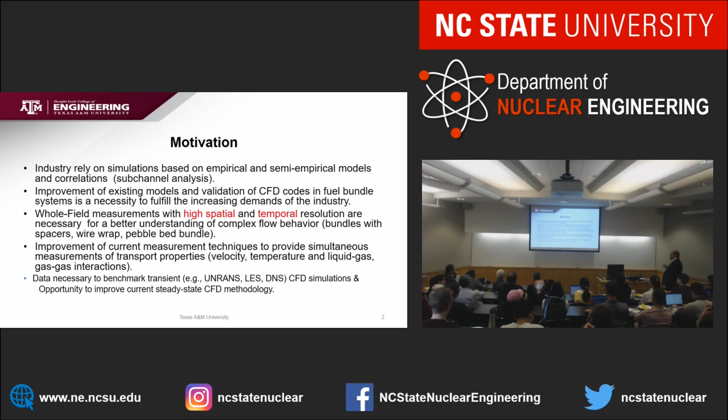We have a lot of collaboration with partners. We worked with some utilities, South Texas Project, with some companies there to try to solve problems, like deposition of debris from the containment on the screen that might prevent water going back to the reactor. We did some work with South Texas Project, and also pebble bed work.

We have some work with Belgium, SCK•CEN, because they're interested in liquid metal reactors. And we have a lot of work with CASL, which you guys are a major player in, along with Sandia and other labs.

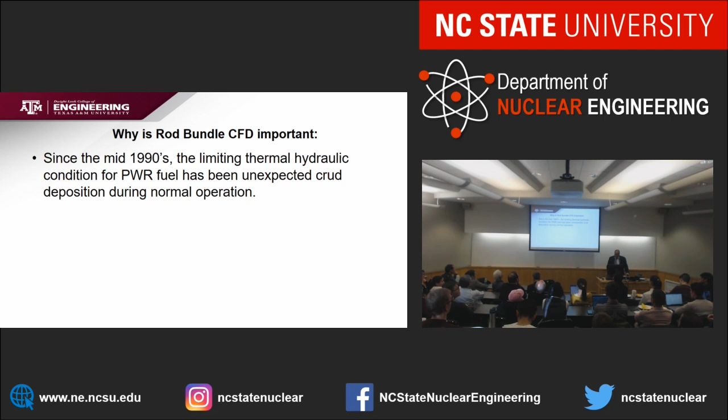I'm going to talk about some of the measurements we're doing for preventing - you're aware here with the crud deposition. So we're doing some work in light water reactor, and in advanced high temperature gas cooled reactor.

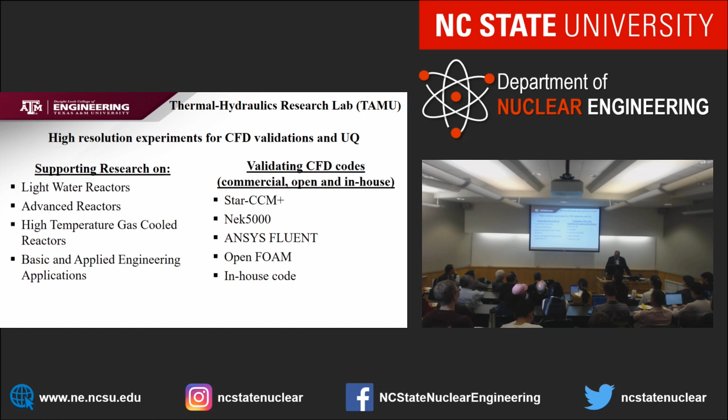For validation, we have our own codes, but at the same time we're using commercial codes like Star CCM, Fluent, and CFX. In addition, we have a lot of work with NEK5000, which we use for direct numerical simulations, and OpenFOAM, which I see a lot of work here you're doing. I'll skip that - Igor knows that more than me, and Namdina.

What is the difference between verification and validation? To solve the mathematical equation correctly doesn't mean the equation really is right from the point of view of physics - it doesn't reflect the real physics. That's why validation needs experimental data. You need a good solution technique and so on, so V&V is becoming a major task.

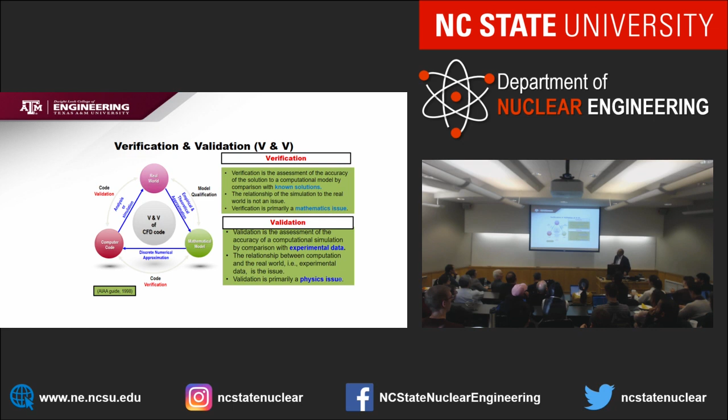Even the American Society of Mechanical Engineering has different committees - 10 for structure mechanics, 20 for fluid flow, 30 for nuclear systems. And now there's a lot of work on scaling, and Namdina is collaborating on that.

So here is one experiment we tried to do. The reason there's interest here in North Carolina is the spacer and the wire wrap. Wire wrap is used for liquid metal reactors - instead of using the spacer grid, they have the rod and put wire around it, which increases heat transfer while reducing vibration of the tube. So we need that. There's a lot of CFD calculation, but the challenge is how to validate it.

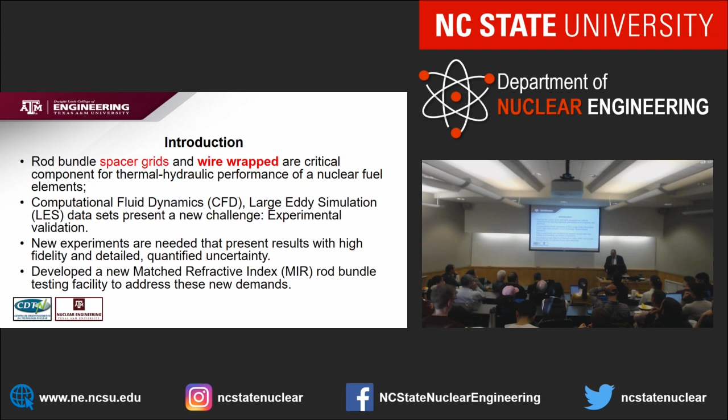So that's our work - we came up with a certain scheme. Our bundle here has 60 or so rods, and here is a spacer grid. That work is also done under CASL.

This is the data we get, running Star CCM with about 500 million nodes. It took about 2 months for the student to do that on a Blue Gene machine, but you can see the structure of the flow. The most difficult part is deciding what kind of turbulence modeling to use - that's important to understand the phenomena so we can use other codes.

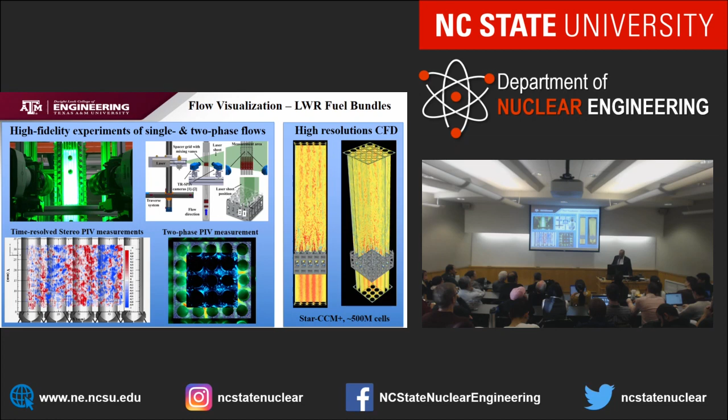To compare this data, we used certain rods with the same matching refractive index as water, so when you do that it becomes transparent, and we use our laser technique to measure it. Here, let's show some of the results - NEUP, which we did before with TerraPower because they're interested in liquid metal, and with Argonne National Lab because we use NEK5000.

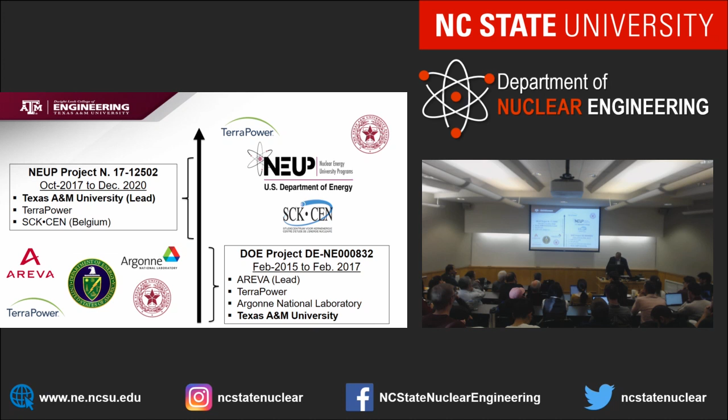So the project is a bundle here, and we used wire wrap to produce the rods.

You can see the rods, we produce this with acrylic. It took us a lot of time to get the right pitch and develop a technique to wrap the wire on the rod, and then we put it and establish it.

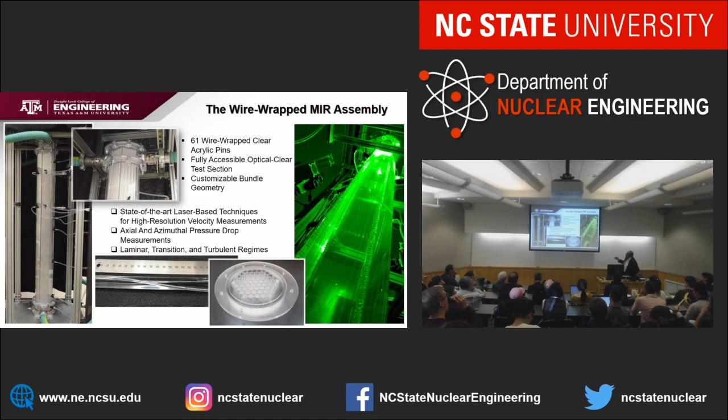So we have this kind of bundle here, and that shows the bundle. You can see this is the rods. Then we have a certain fluid that has a matched index, so it becomes transparent. After that we use our laser technique, which is presented in many papers.

So you can use the two-dimensional approach to get the velocity in a plane, or use a stereoscopic setup. In this case you need at least 2-3 cameras to get a 3D dimensional result. And that fluid is known to have that property.

At the same time, we have particle image velocimetry, which gives a full field measurement of the velocity, but we also like to validate it, so we use another technique, laser Doppler velocimetry, at a local point inside the bundle. So this is the first result you get inside the bundle.

There was a lot of experiments performed in the 1980s and 70s in Germany to get the pressure drop, but they didn't know what the structure of the flow was.

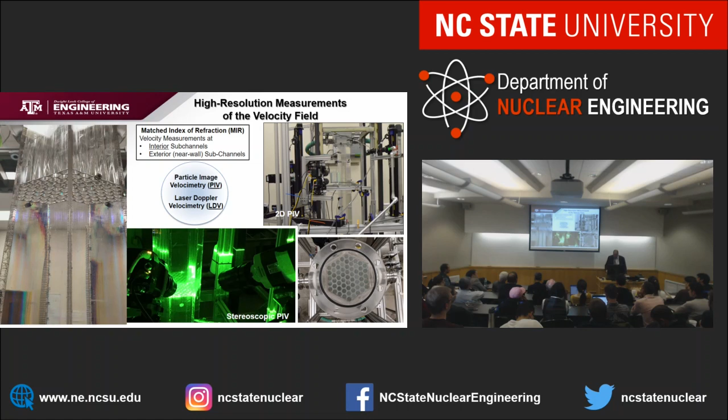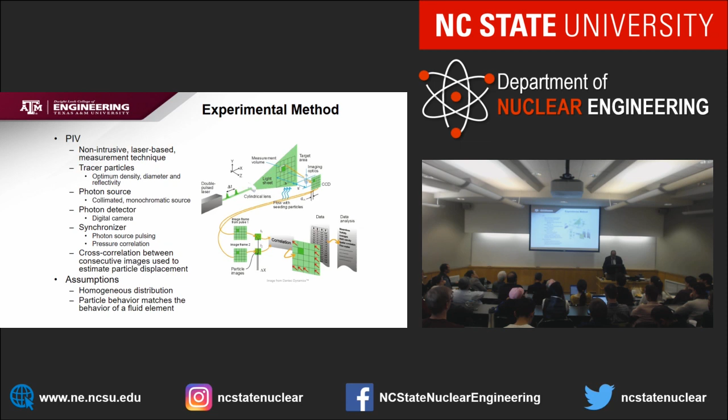So now we have all this stuff to do. That shows the experiment we have, the fluid and so on, and we use our technique and do certain analysis here.

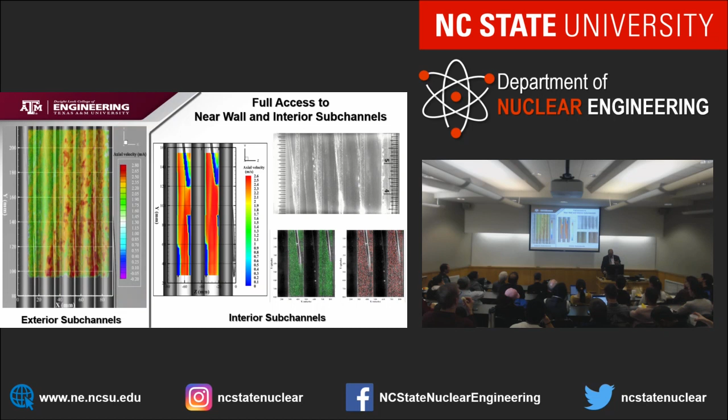But we like to see the exchange of flow from one sub-channel to another, so we had to come up with a different way of measurement. So we get our laser here, our camera has to be on the top.

It took a lot of time, and we tried to focus on several sub-channels here to get the velocity in the horizontal plane.

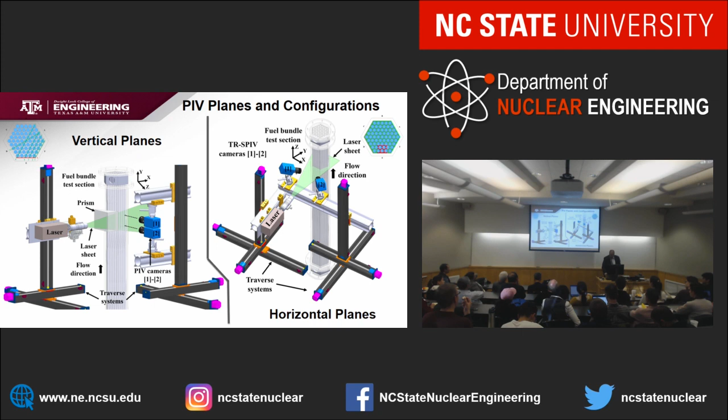And that shows some of our velocity here in the axial direction, one, two. You can see the reason we use two cameras in that region.

The reason for doing that is because we tried to use high resolution, and we reached a length scale of about 10 micron or 20 micron. So we're getting the fluctuations down to the smallest scale of the structure of the fluid.

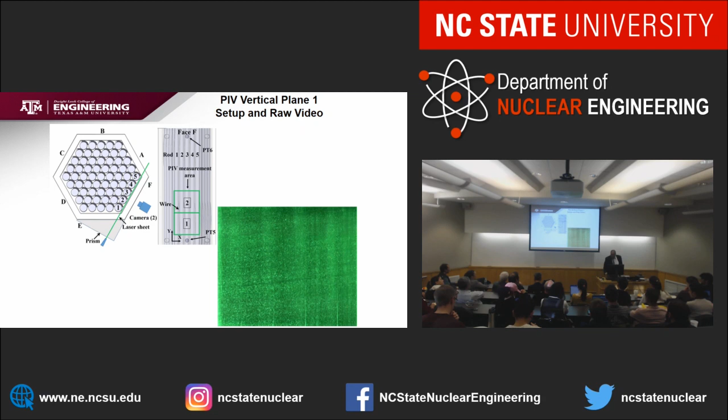And we did that at different Reynolds numbers. Here you can see 4,000 and 19,000. The flow comes in with this.

The reason also, I forgot to say, we measure the pressure drop too. We have a sensor here, so we can get the pressure drop. There was a lot of measurement before to measure the pressure drop, because that's one of the most important parameters for designing this reactor.

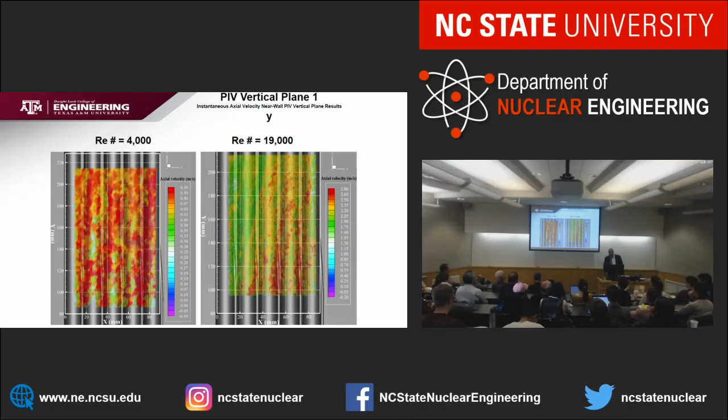So we get that here, but we also get the time. You can see here, I don't want to bother you, you get instantaneous velocity and so on with the time. So that's one of the things.

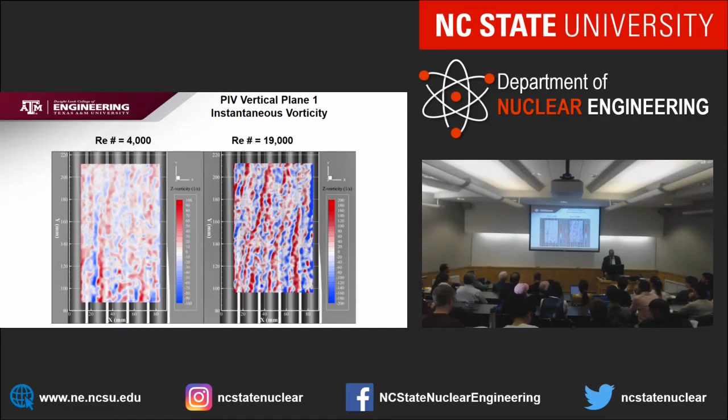But one of the interesting things, people in Belgium told me, sometimes you have a blockage in the channel. They found that in liquid metal you get a blockage, and they wanted to see what's going on.

So we blocked one of the channels here, you can see we blocked two channels, and tried to see what the velocity was below and after that. This became of interest to people building liquid metal reactors, because of the blockage issue and different structures of the flow.

So we had a blockage at the center of the channel, and a blockage in the boundary here, interior. So this data is very rich data for validation of the code.

In Germany or Belgium, they had another experiment with about 19 rods, here 61, and they used sodium and heated it. It's interesting that they only got temperature measurement, and maybe pressure drop, but temperature measurement, and they did their CFD with no comparison. They could not know what was going on.

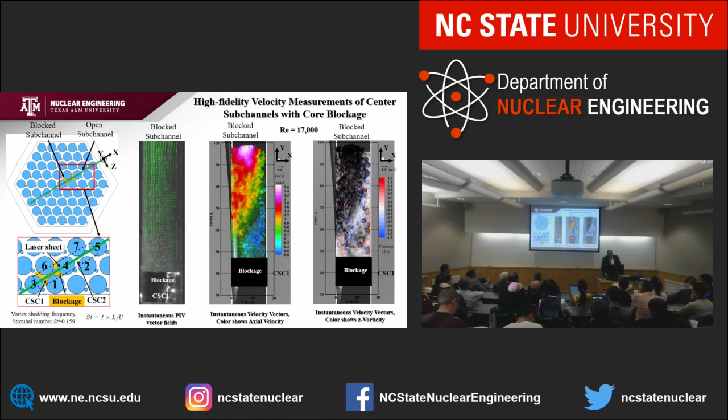So our data here, at least gets the physics phenomena, and that's of some interest. Again, this is just a flash.

In any experiment, you have to do an uncertainty analysis. If you give an experiment without this error analysis, it's not a real experiment. Like Igor mentioned, when I look at papers coming into Nuclear Engineering and Design, if the author has a measurement without any analysis, I return it back.

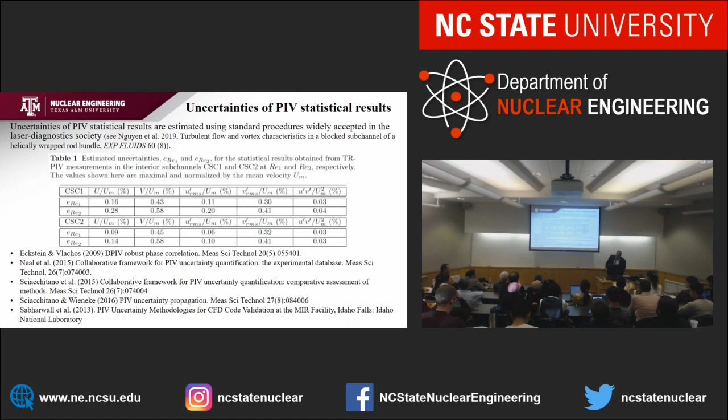Here is what we did, NEK5000 as a code. This is a comparison between NEK5000, the solid line, and the data. This is a code which ANL, Argonne National Lab, got our data and did using large eddy simulation and compared that. It takes them a long time, like the experiment really, I can say.

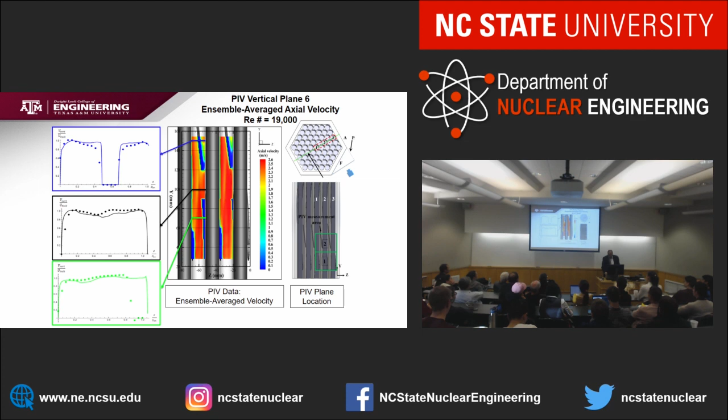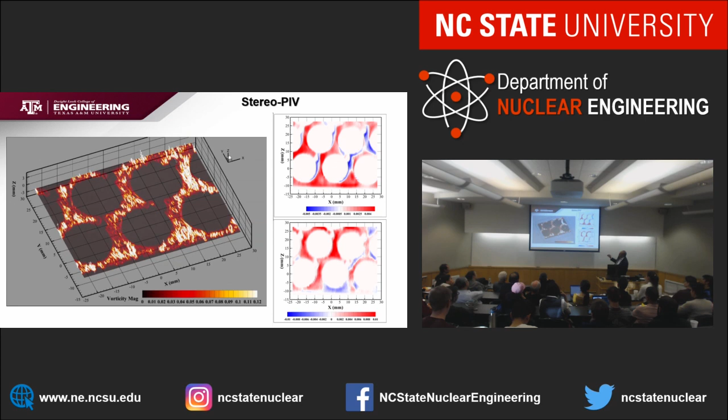This shows the 3D, but it's not really clear. There is the exchange of momentum between sub-channel to the other. We should understand that and get it.

This is one of the pressure measurements here, there is a lot of correlation of this measurement. So what we did, our measurement from 200 to 20,000, you can see Reynolds number.

There is another figure, not here, with other correlation, and you can see a large uncertainty there. But one of the points we are so proud of, that we got at Reynolds number about 100 or 200, or 250. There is no experiment for the wire wrap in a bundle lower than 2,000. It's amazing, because the reason is getting the flow rate.

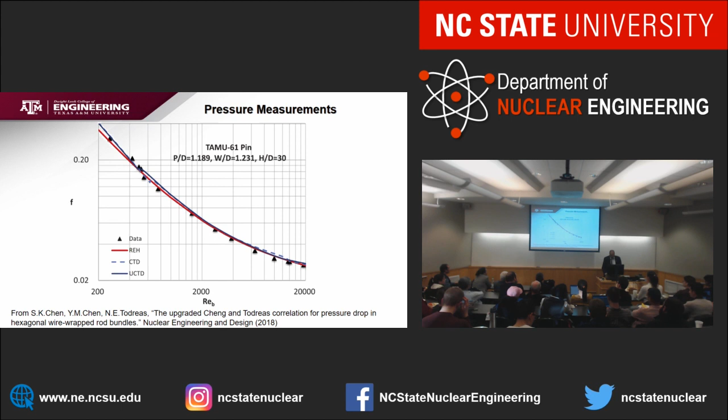One of the most difficult things in the measurement is the low flow rate in the lab, using ultrasonic or whatever it is. So that was the first point. We didn't find anything, so this correlation can be used, TerraPower is using it for their design and so on.

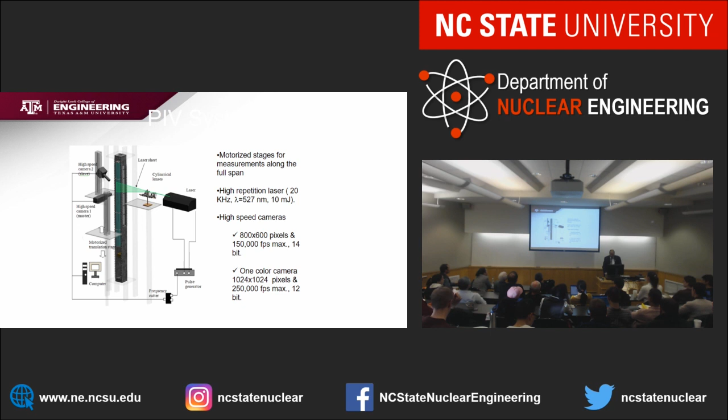This showing the velocity in a wire wrap. The other thing we showed before is the bundle, is a mixing vane. You can see here also we used our fluid, that's important to see the measurement in a micro scale measurement, before and after.

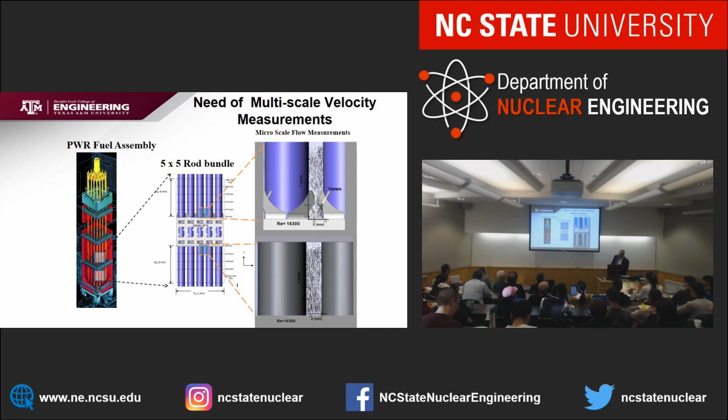So that's very good for CFD measurement, you can average it and also get this measurement to use for other codes like COBRA-TF and the sub-channel code. You can see how painful it is doing this, 1 million vectors here, and the time resolution 125 microseconds. So it's huge, every time they want storage, the experiment is producing a lot of storage.

Maybe this data is important for machine learning, to train or to do that when we scale it or use it. So this data is available, and that.

As I mentioned before, this is the reason I put this, Igor. We got a 3x3 from Dresden, and they shipped it to us, a bundle. They have 3x3, and they want to do measurement using our facility. Why? Because they have X-ray, and of course they want to compare it.

So the engineer came here, spending 6 months, put the experiment together to get the velocity distribution in this. So we give them that, then take the data.

When this sub-channel is about 1 meter, and it came to Houston, our colleague German, he said a nuclear bundle. Then they took it in customs and called the president of Texas A&M, what's that? And so they called me, and I had to explain, it's a sub-channel, believe me, there is nothing there. It's a glass. And they should have said it's a 9-barrel gun, right?

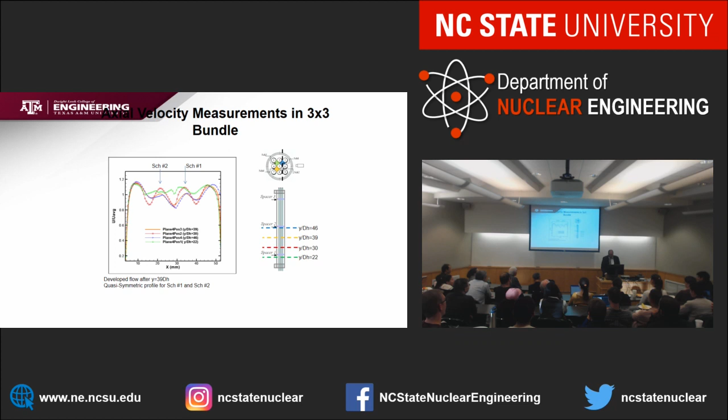Yeah, so then we had to send the student down to pick it up and send a paper saying it is, oh my gosh, what a mess. So you can see, next time when I ship something, I don't write that.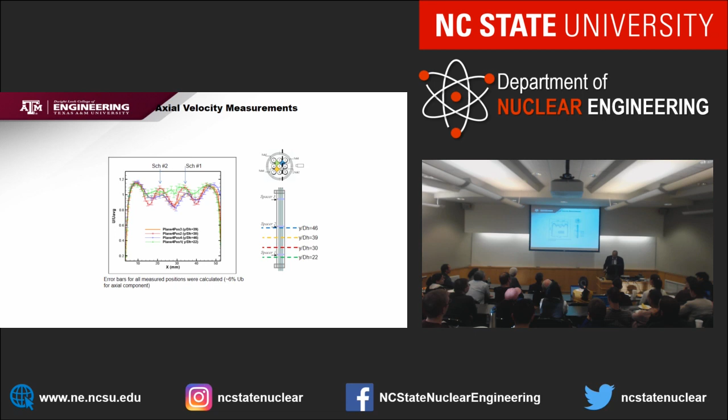But here to show, you have to have error. If you don't have this error bars, forget it, this paper will not publish. So please, when you do analysis in the lab, you have to do that.

Here also to show some of the work we did, you have a spacer, 5x5, we got it from Westinghouse, and we put the fluid here. This is a new fluid that has matched refractive index as the glass. Here is some of the air. Then it's really beautiful, you can use a laser, you can do that. So we did a flow visualization. You can see the uncertainty.

A colleague from Brazil came and spent the time because he has funding to do it. We don't have funding because the Department of Energy rejected my proposal, but I didn't care, so I went ahead and did the experiment. There are about 2-3 students working on that for their PhD, some at Oak Ridge National Lab, others went to other places.

The guy who did CFD here is from Italy, Luigi. After that, do you know what? He has his own financial company in Europe using machine learning, and he's happy.

What you're learning here is not nuclear engineering only, you can work anywhere, mechanical engineering. My student works in a petroleum, pharmaceutical company, because you do 2-phase flow, powder. One of my students, even in 1990, couldn't find a job, so he finally found one in Virginia at a pharmaceutical company. I saw him one time at the airport and said, Mark, you should come back to nuclear, it's coming back. He said, Dr. Hassan, are you crazy? I'm going to Switzerland skiing. If I were in nuclear engineering, I wouldn't go there.

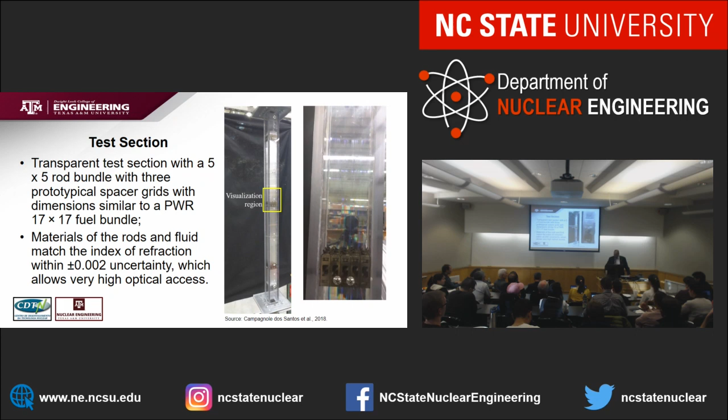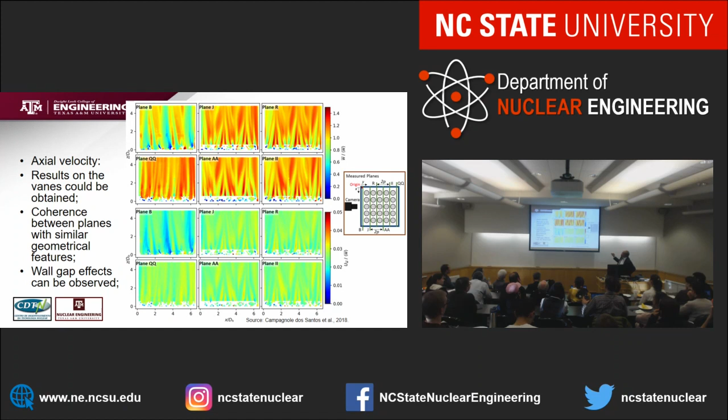For the sake of time, this is a comparison between CFD and the data here. Anyway, this data is very rich, we can see. But this is the mixing, very close to the mixing vane, and there's no result like that to get close to it.

But we're trying to do that, as you saw, when we ran it with 1.5 billion nodes, it took 3 months. The student couldn't graduate, he was waiting for a result. He'd go to the bar drinking all night, then come morning the computer wasn't giving a result. So he ended up, it was really bad.

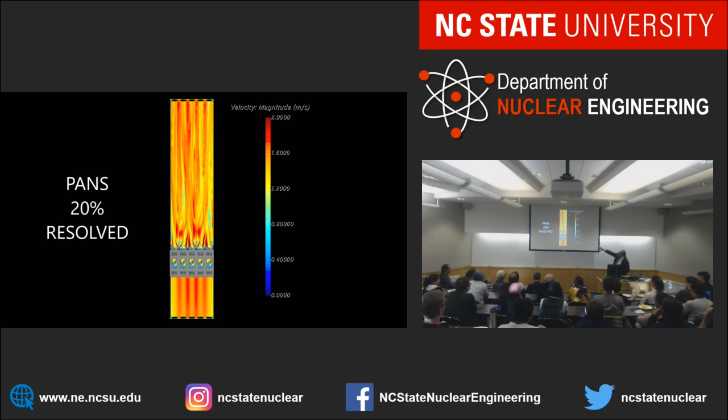So here, what we tried to do, this is steady, we used RANS. What we used here is RANS, and you can see RANS doesn't show any fluctuation we have, it's smooth here, there is no fluctuation resolved. So we're using K-omega here, in steady state.

Then we have PANS. So instead of averaging the Navier-Stokes equation, Reynolds-averaged Navier-Stokes, this is partially averaged. What happens is there's a fraction f, part is modeled through your RANS via k-epsilon or so on, and the other part is resolved. So what we do is change this f here to 0, that means we don't resolve anything, we use it like k-omega, and you can see there's nothing showing, no fluctuation.

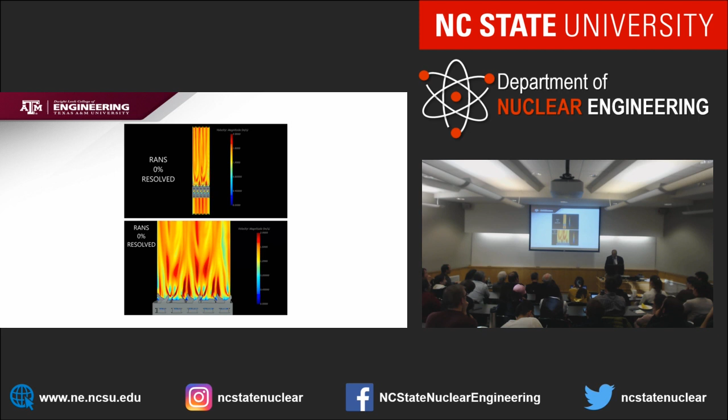But once you add some of that f, you can see at 20% resolved you get some fluctuation. At 90%, large eddy simulation, you get better fluctuation. So what we can do is use that to get more detailed resolution where I need it, resolve it here and forget about it elsewhere.

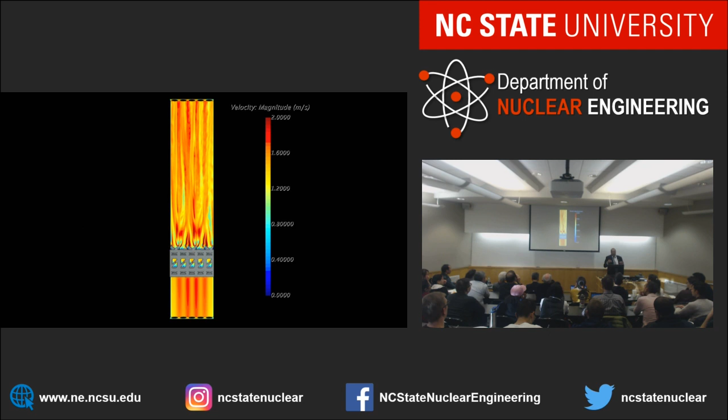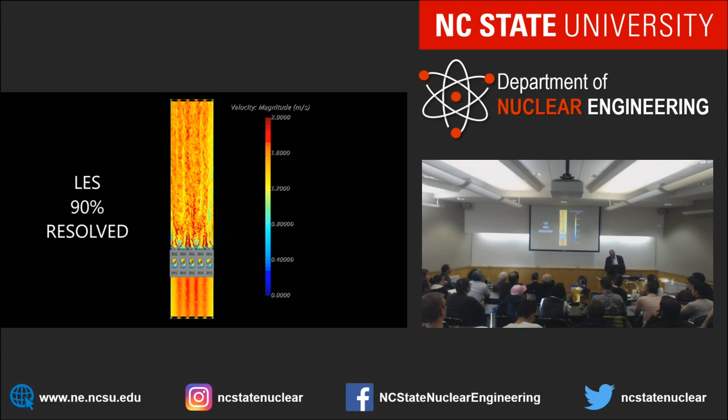So there's a factor F I was talking to Nam about, maybe with his machine learning, to get the best values, and it can be changed from one location to another. Where I need better results, I can use 90%; here I can use 0 because I don't care, since I know the structure of the velocity there. So that's the new thing we're trying to learn, to understand using our data - because I believe my data, but the experimental guy never believes his own data, while the person who does CFD always believes their data, which is always wrong, by the way.

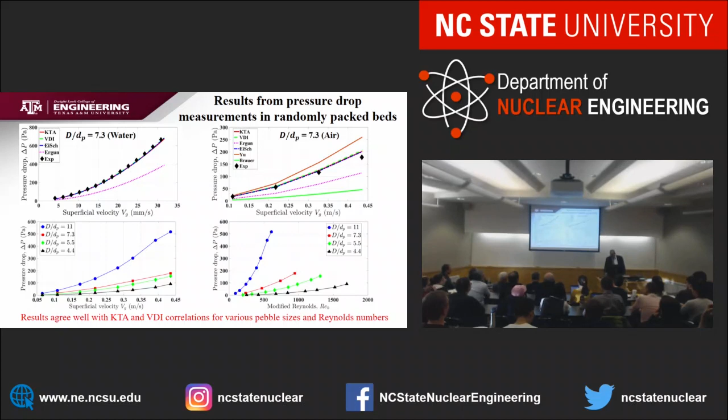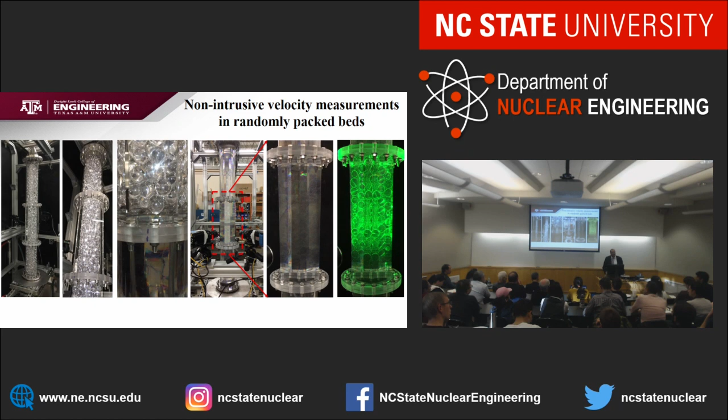So that also gives you insight about pebble bed or gas-cooled reactors like X energy. We've done some experiments, playing with fluid here - you get the sphere randomly and try to get the data to give to people to do CFD. We give them even the structure, the frame, everything, and then they do their CFD. It doesn't match with our experiments, so they come and tell me my experiment is wrong.

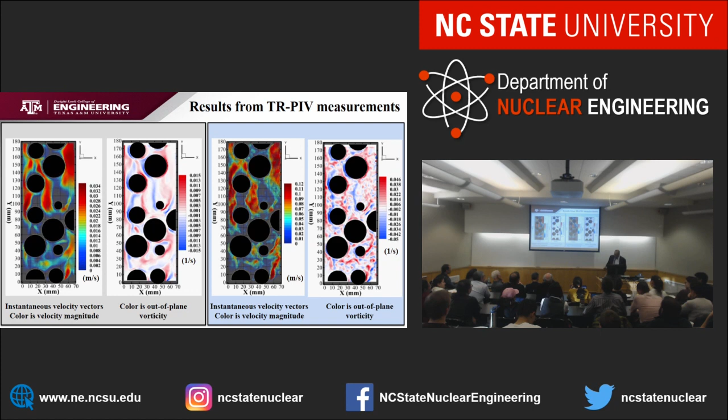And we tried not to tell them that. So we're working very closely with the CFD to get the structure of the flow between the spheres, maybe doing average or machine learning when you do instantaneous. So that helped the new design of the reactor.

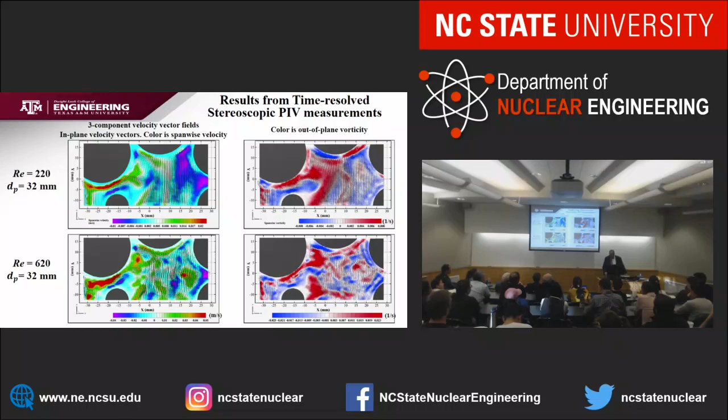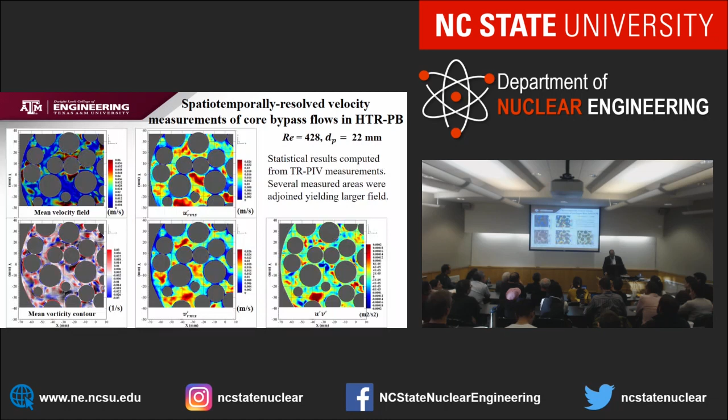You can see here several spheres, what a mess is that flow, recirculation, some area. So you may get one area here, an unlucky sphere comes here, and we get a hot spot because there is no dissipation of the heat. So you will end up with a problem. Also, again, remind you, you have to do uncertainty. So that's what we're doing, and some of our students are getting this data to do some simulation of it.

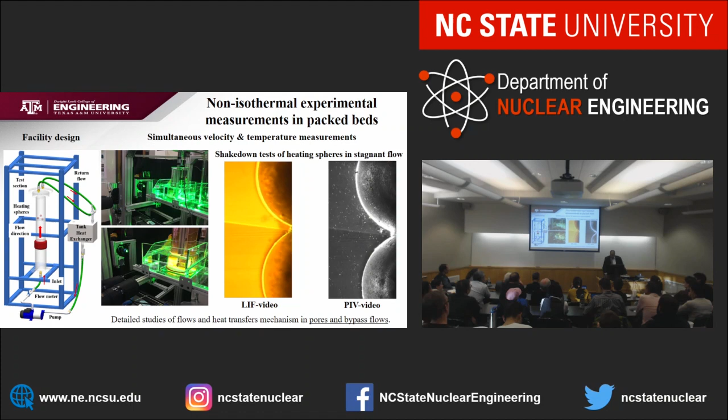I go back one. Okay, oh yeah, here, what happened is our friends at CFD said, you don't give us this random location. So we use a scheme here, a kind of tomography, to construct the sphere. We give them the right location of the sphere. So that shows some of the ways we do it. You see the sheet of light going up, so we get exactly the CAD design of the sphere, and we give it to them, and then they do CFD. So they come back and they don't.

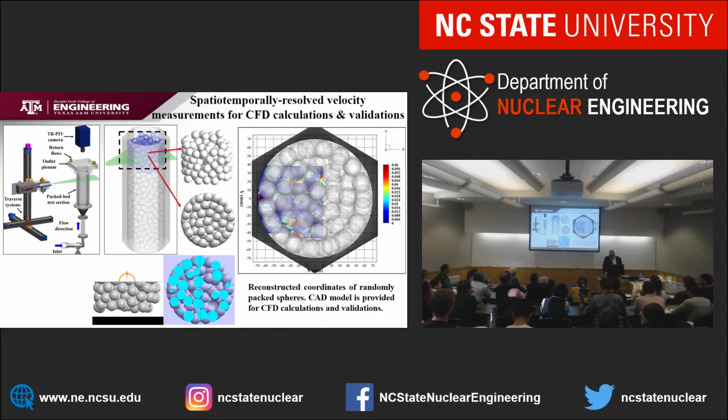Also, they tell me they need the right inlet conditions, so we give them a full field velocity here, inlet conditions. So we're trying to reduce their excuses of getting a wrong result. So I work hard on that to prove their code is wrong. Okay, so that's why, that's why Department of Energy doesn't like me.

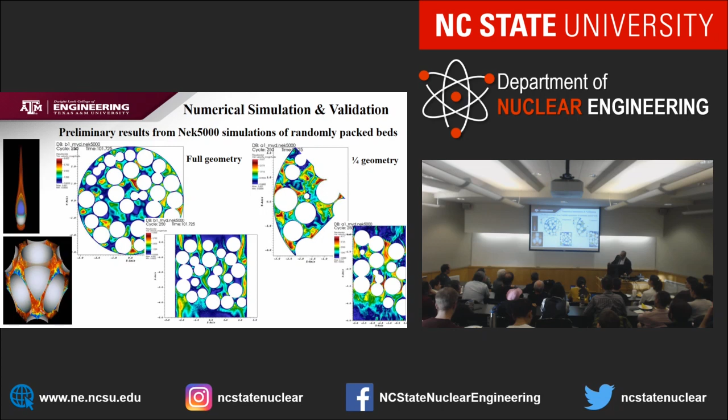His name is Lambert, and he works at Kairos right now. So he did that, but he worked with other code. So that gives you some idea what we are doing in our lab.

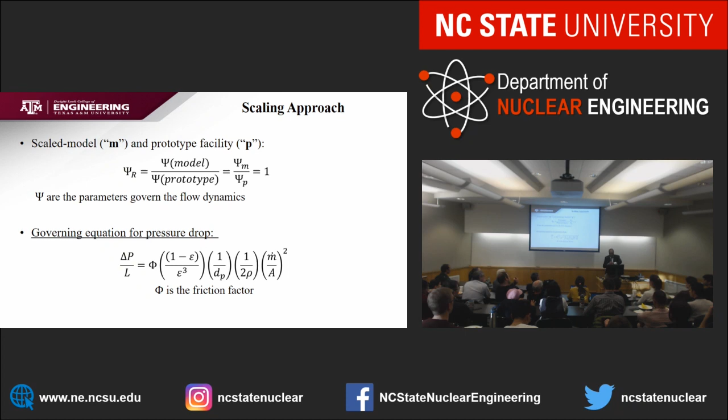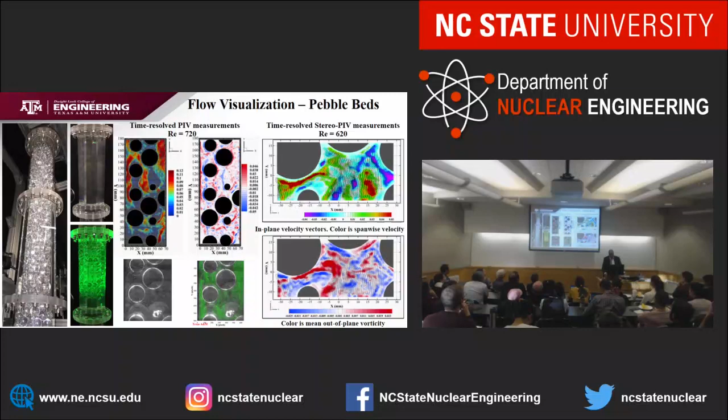How am I doing on time? Oh, still I have time? Oh my God. Yeah, I think one of the things we did, I don't know if I have it here. I want to go to this one. I remember, I told you when you have a certain sphere, you may get a recirculation, and that's my expectation here.

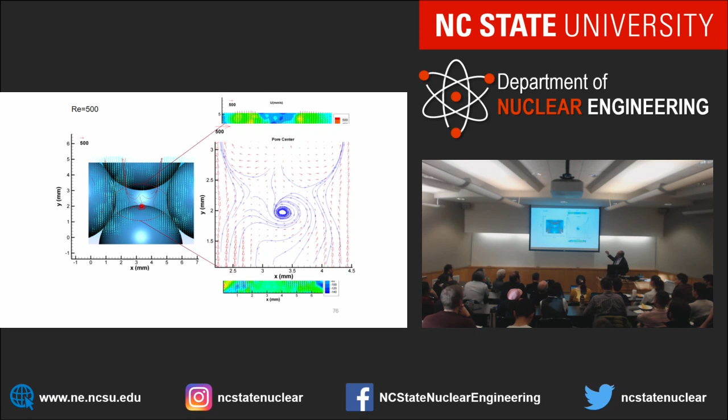So maybe this point gets too hot. So what will happen is you get a recirculation. This is experimental data to prove that we have a dead zone here. And what will happen, this is from Syd Ball. He got it showing the picture of one sphere in KFA in Germany, shows the oxidation. All the sphere is so clean except this unlucky sphere got stuck, and it happened on this, I call it dead zone, and it damaged.

So they wanted to know how this sphere, not the others, got into a certain pattern, got a lot of recirculation, got a hot spot you can see. So this is a real sphere. He gave it to me, Syd Ball, in 2006. He got this picture. He retired now from Oak Ridge.

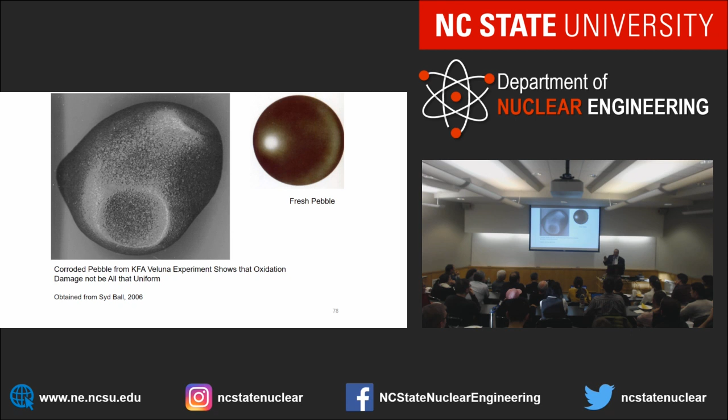By the way, he has a good program in his garage. I'm trying to get it at home. He knows how to get these spots with a very simple correlation and that. So I think that gives you an idea what we're really trying to do with collaboration, with you guys giving all of that. So that gives you some idea.

I don't know if I have one movie, if you have it. I like movies. I tell my student, you can ask David Holler. He couldn't graduate until he gave me a nice movie, right? I tell them that, because that helped me to understand the things a little bit. So I have the same criteria in my group.

Yeah, yeah, that shows some of our work. I don't know. Yeah, our lab, but I think I gave you everything here, maybe what I have. I thought I had a movie to show.

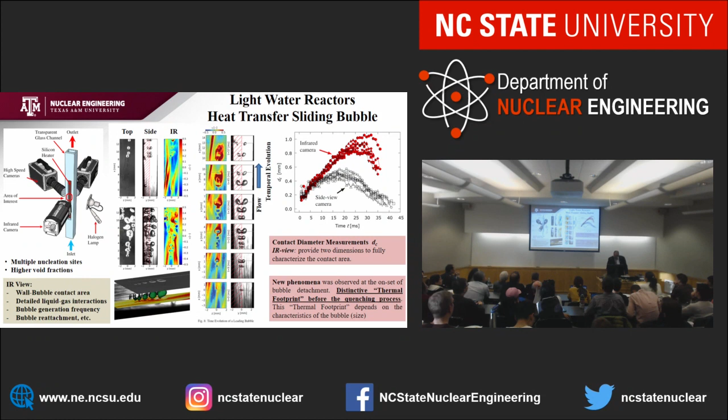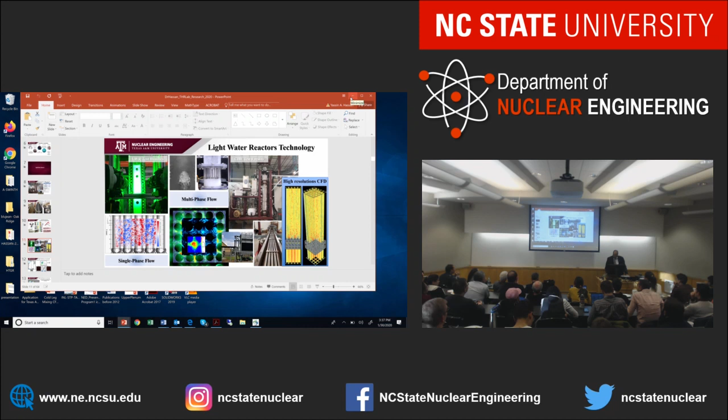Yeah, this is done by you guys in subcooled reactor, in subcooled boiling and so on. Okay, it seems I don't see it, but it is an experiment we conducted for NEA, mixing in the cold leg of the reactor. So it seems I don't have it right now, but I will be happy to answer any question. At the same time, if I find it, I will send it.